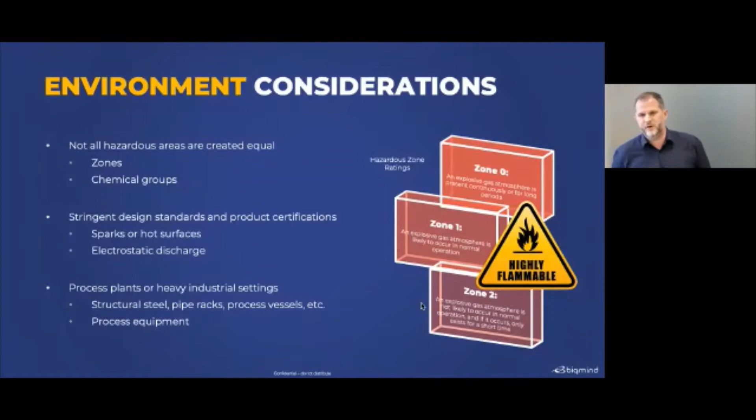So these are some of the considerations we need to look at when designing for Industry 4.0. The challenge we had is the harsh natural environment of oil and gas, especially on the exploration and drilling side, but also that hazardous environment. There's also requirements where musters and safety drills have to be executed once a month so that the workforce is kept safe.

So a lot of regulation is put in place to ensure the safety of that workforce. There are existing solutions available in the market, but typically they're very expensive, complicated, and only single point solutions. The other area of challenge is low and unreliable connectivity. If you can imagine an oil rig offshore, it's going to have very low and restricted bandwidth, so the advantages of using the cloud are also a challenge, meaning you can't solely deliver for cloud connected.

The actual solution delivered for that industry, on the exploration side, requires temporary solutions, so we have to be able to build for temporary or permanent solutions. We have to reduce the amount of cabling, meaning we have to look at as much wireless technology as possible. And the range of customers and sites this solution would typically work for ranges from tens of workforce up to thousands. So it needs to be able to deal with that.

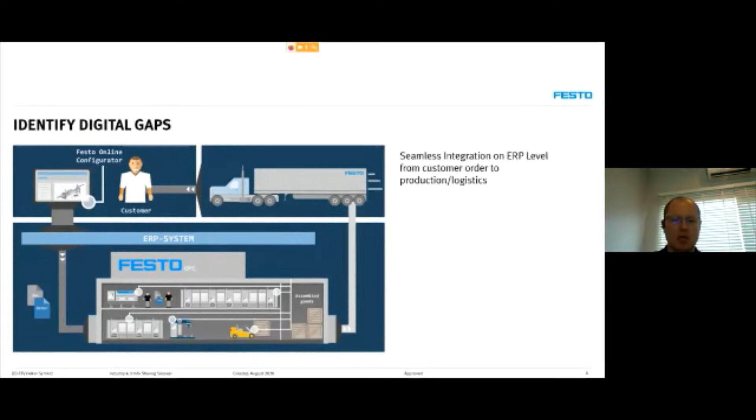So we started first of all to look into our digital gap, and there is actually a lot. Whether we look into the shop floor or into customer interfaces, we are facing a lot of digital gaps, and they are still prevailing here and there.

I mean, the shop floor is not fully integrated. We have a lot of isolated systems. We have a lot of older equipment, which is also not ready to be implemented.

And to give you a little bit of detail, on our shop floor we are still using more than 40 different IT tools. And I think this already shows a big challenge when it comes to digitalization and implementation.

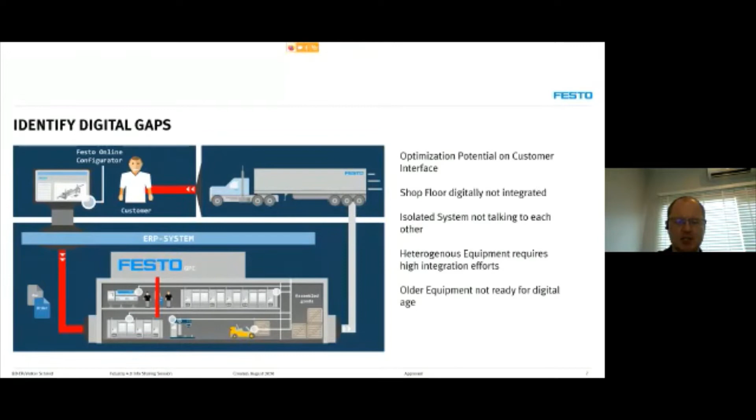And I think we are not the only ones. If I'm not wrong, also some good friends of mine from Bosch are in the call, and I'm pretty sure they can confirm that they are also having this kind of tremendous issue.

So first of all, closing the digital gap needs to be addressed, of course, from the top floor to the shop floor, or vice versa — data flow from the shop floor, from the machine level, up to our ERP system.

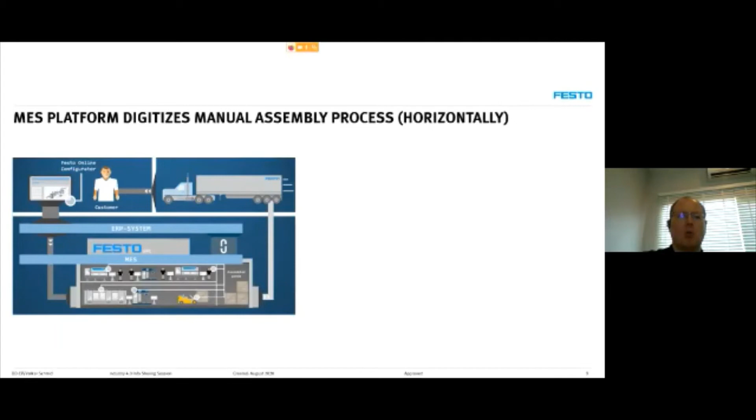What we also did, and this is where we invested a lot of time, is we digitized our manual assembly processes. I'm also not going into further details. However, here you see a few technical support tools, like a glove cam, a barcode reader, assisting all those kinds of movements.

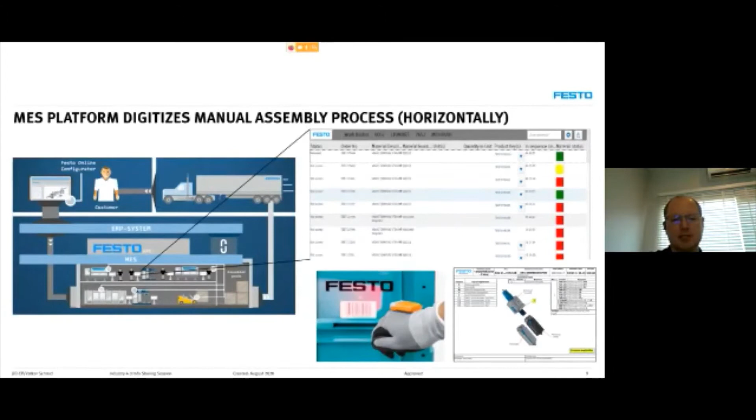And what may go totally wrong is if people do not really consider how to digitalize, for example, the assembly instructions. It is a huge effort, and this is normally underestimated. It's a huge effort to digitalize this. And just imagine one instruction goes wrong — you won't be able to come out with a proper product.

And this is why you need to keep in mind that whenever you apply digital to a broken thing, you will end up having a digital broken thing. And this is also coming up a lot now when we talk about digital twins, when we talk about more applied simulation tools.

Whenever reality does not work properly, of course, digital will not work properly either. And this is the underestimation that a lot of companies do not consider. This is another area where we really need to train and skill our people further.

So here are some examples. For example, when we talk about this assembly support system, here we are using our SAP Manufacturing Execution Suite. This is our overall, overarching MES as well.

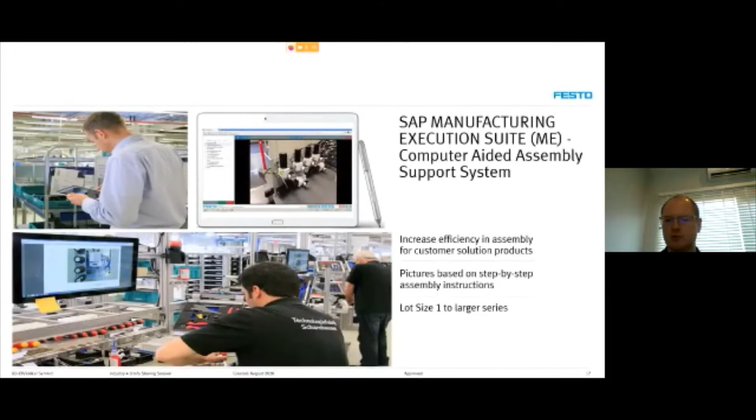Of course, as I said, here and there we are still using a lot of other tools, because it is currently not possible to reduce the amount of IT tools to just a couple, or a handful, of tools.

What we also do quite nicely is what we call mobile maintenance. I mean, the core skills of maintenance remain the same. However, we have a lot of technical tools well in place so that we can have the documentation ready, and we can order spare parts on the tablet.

Spare parts with the next milk run are automatically coming onto the machine. People do not need to go back to the office and start a computer to order spare parts.

Let me go back one slide to show you this automated assembly line again. It looks quite homogeneous. There are 7 manufacturing cells, but they are all coming from 7 different suppliers. This was willingly our decision, to go for individual suppliers in order to force them to talk to each other, to really integrate all different kinds of special solutions into one manufacturing line.

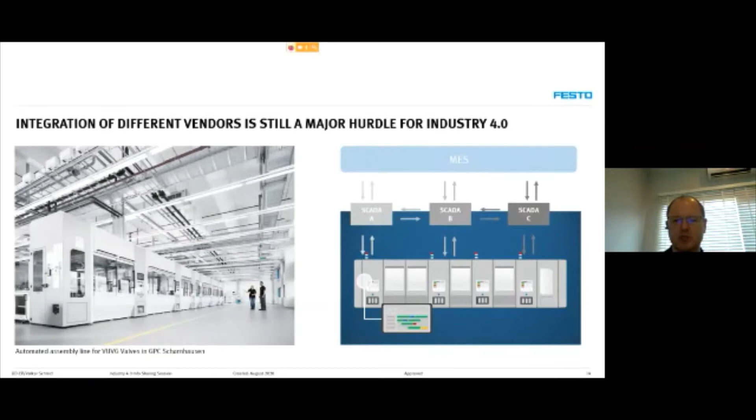Yes, a lot of hurdles had to be overcome. A lot of complexity had to be overcome. We also had to force those companies to open up their source codes in order to implement that machinery. But this is actually Industry 4.0: integration of various vendors, integration of various applications into one, all under the umbrella of the MES system.

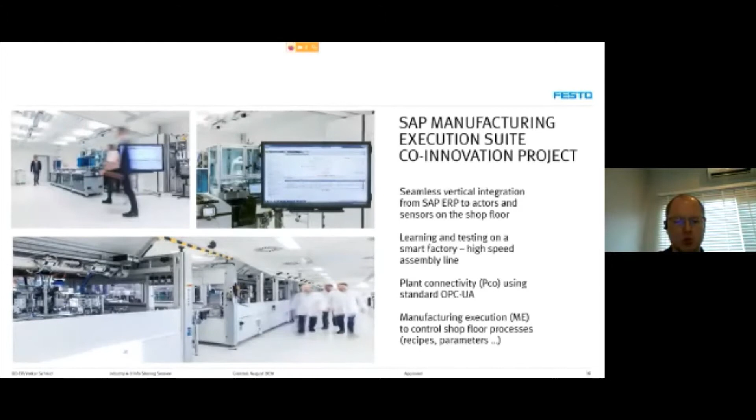Here are some other impressions. I will not go into further details, as the slides are also to be shared after the session, and you can review the live recording of the session.

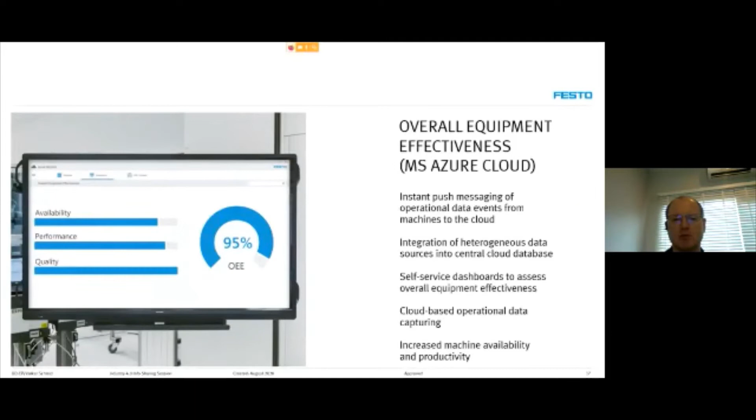Yes, we are also collecting big data, but the big question is how do we analyze the big data, and how do we make use of it in the most efficient and effective way? Here are some further ideas of what we do: scrap rate analysis, outlier analysis, setup times, and other analysis of production in order to really increase productivity and decrease downtime.

And as I mentioned in the beginning, we are also working heavily on our energy consumption, and I think this is one of the major wins - reducing energy consumption tremendously, in some applications more than 50%. And I think this is cost saving, which may be a complete different part of another presentation for some time.

Very important is also collaboration. Whenever Industry 4.0 implementation takes place, obviously we need all departments involved. We not only need IT or manufacturing, we also need human resources. We also, of course, need product development in order to really join this change in terms of implementation of Industry 4.0.

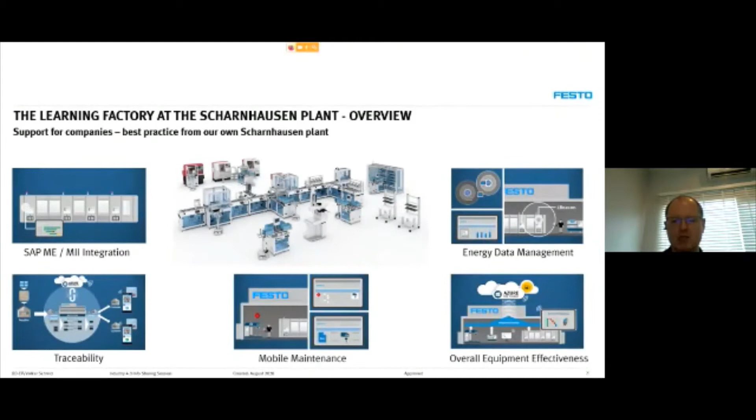It's a real hands-on training environment in order to develop the skills, the experience, and the knowledge of the employees. And now, of course, based on our experience, we are also offering those courses externally.

For this reason, our best practice example is also our CDTI center in Singapore. It's a competence center for digitalization, technology and innovation. This has been jointly set up by the Technical University of Munich in Asia with the support of EDB.